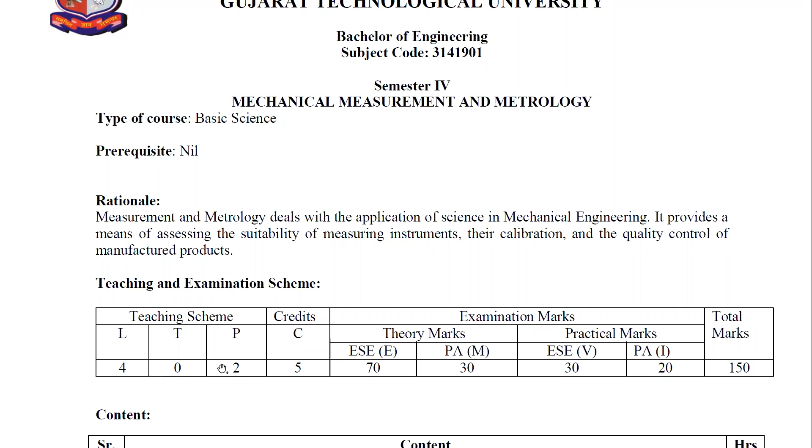Here, the total will be 4 lectures and 2 hours of practical per week, which means one lab and 4 lectures per week, and the total marks is the same as the others.

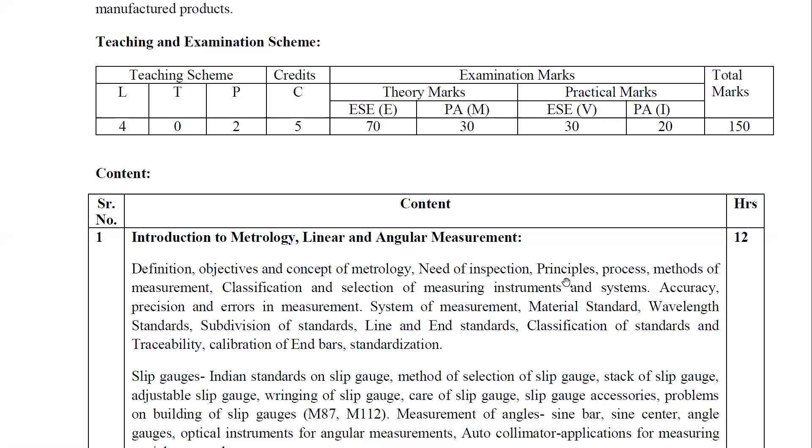The first chapter is the introduction to metrology, linear and angular measurement. Metrology is a science which involves all kinds of measurement. So that is the basic about metrology, and then starts the important part, that is the linear or angular measurement. As an engineer, you are supposed to make linear measurements as well as angular measurements.

In the metrology section, we will be studying the definition, objective, and concept of metrology. What is the need of inspection? What are the principles, process, and methods of measurement? What are the various methods for measurement? Then there is the classification and selection of measuring instruments and systems, what is the difference between accuracy and precision, error in measurement, and system of measurement.

Then there are various standards: material standard, wavelength standard, subdivisions of standard, line and end standards, classification of standard, traceability, calibration of end bar and standardization. So this section involves basically the first portion up to metrology, and then the measurement classification.

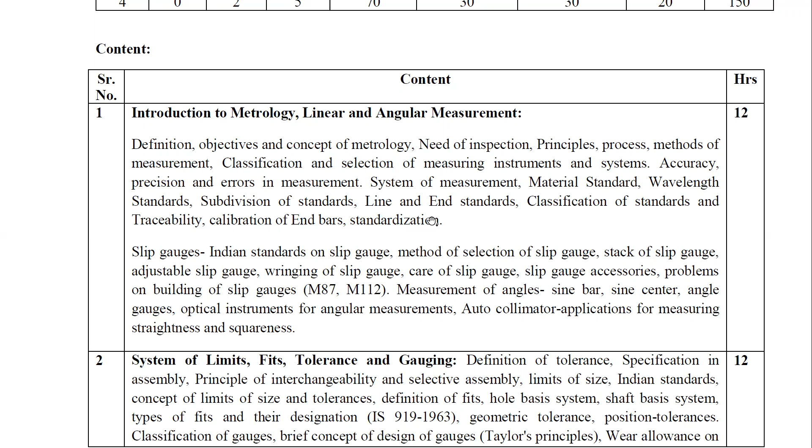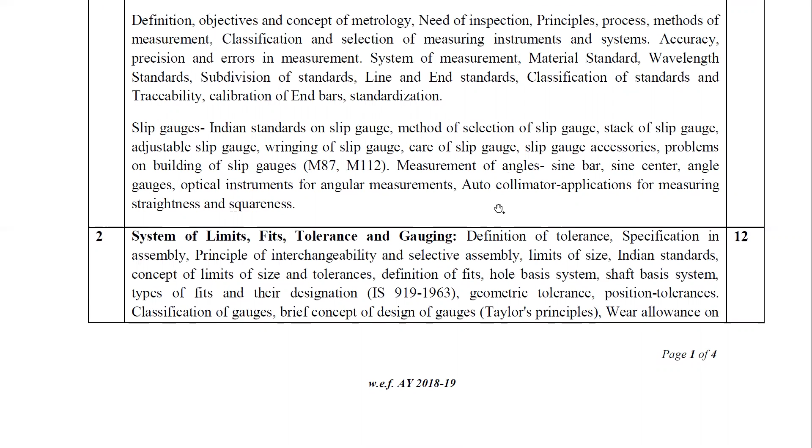The second part is about gauges, slip gauges, you might have seen or not. I will show you the slip gauges and what are the various standards on slip gauges, the method of selection of slip gauges, and the stack of slip gauges adjustment. You will also learn about measurement of angles, how to use a sine bar, sine center, angular measurement, autocollimator. These are the measurements of angles, such as straightness measurement and squareness measurement.

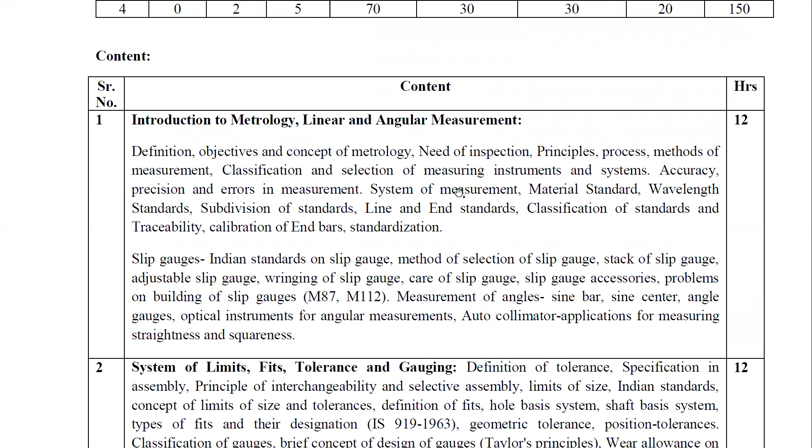So this is about the first chapter. These are the topics involved in it, and I will be discussing them one by one. Then in the second chapter, you are supposed to learn about the system of limits, fits and tolerances, and gauging.

Now, limits, fits, and tolerances, why are they necessary? As there will be parts which you will manufacture in any industry, the parts are manufactured with some amount of tolerance in them, which means they are not specific in size. Every time you manufacture, there is a difference, a certain amount of variation in the size of that part.

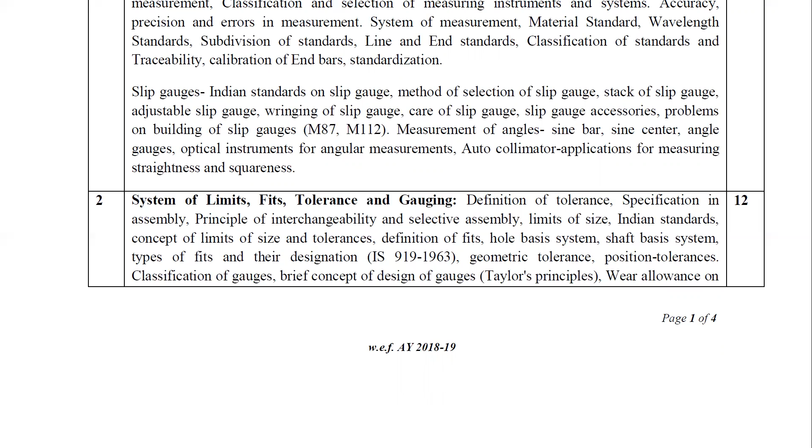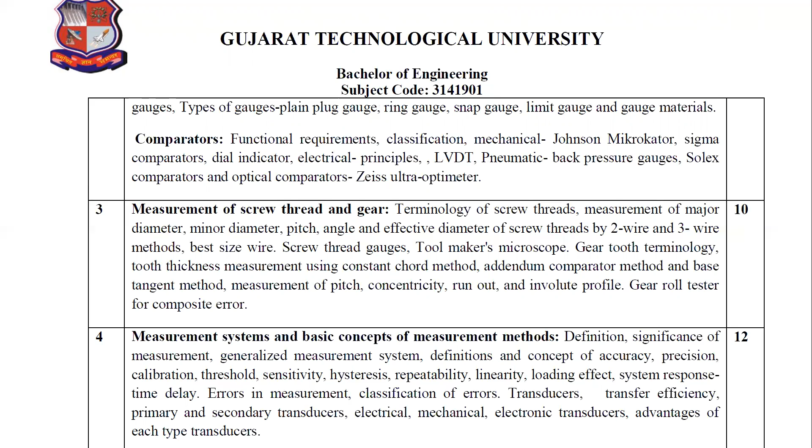The second portion involves the comparators, which are used to compare one dimension with another. Suppose we have a particular height or size of an object, and we manufactured it as a standard part. That standard height is to be compared with another object, or we want to calibrate some other part to check whether our gauge is working or if there is any error. So in the second chapter you will learn about comparators, system of limits, fits and tolerances, and also the types of gauges.

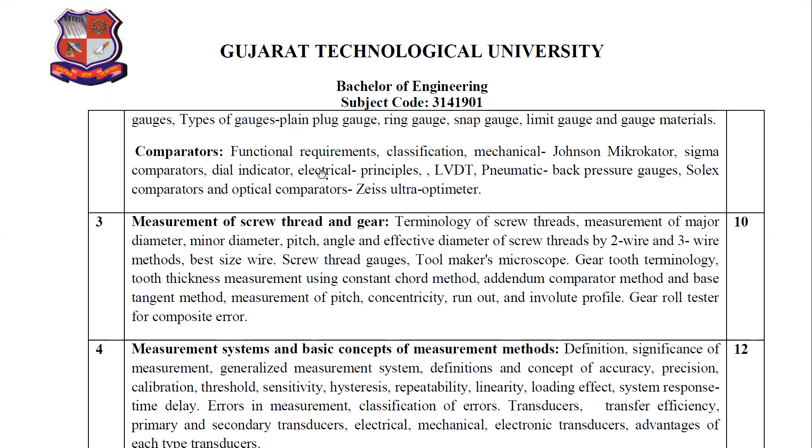The third chapter involves the measurement of screw, thread, and gear. Why is measurement required? Obviously, if the part is not measured, it will not fulfill its objective to fit. The metal parts are very important to be measured so that they can fit perfectly.

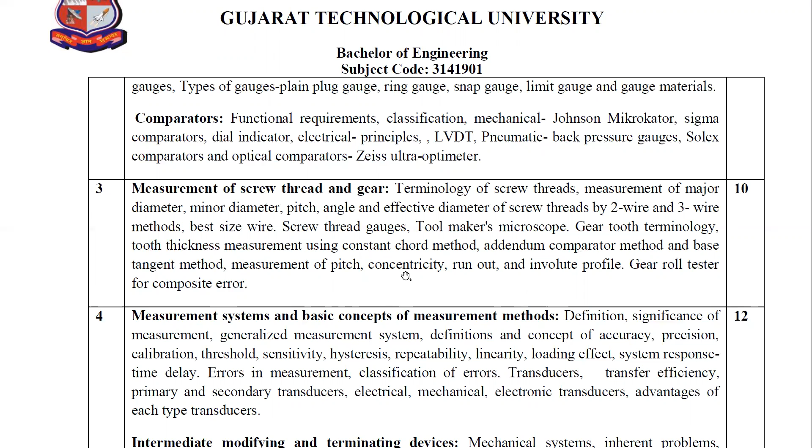How to measure the screw thread is also very crucial, and how to measure the gears too. So in this third chapter you will study the two wire method, three wire method for measurement, the tool maker's microscope, gear tooth terminology, and how to use various tools for measuring gear terminology.

The next chapter is the measurement system, basic concept of measurement methods. This chapter covers the definition and significance of measurement, generalized measurement system, and definitions of accuracy, precision, calibration. There are certain definitions related to instruments: what is the accuracy, precision, calibration, threshold, sensitivity, hysteresis, repeatability, linearity, and loading effect. These are crucial parameters checked for every instrument before conducting any measurement.

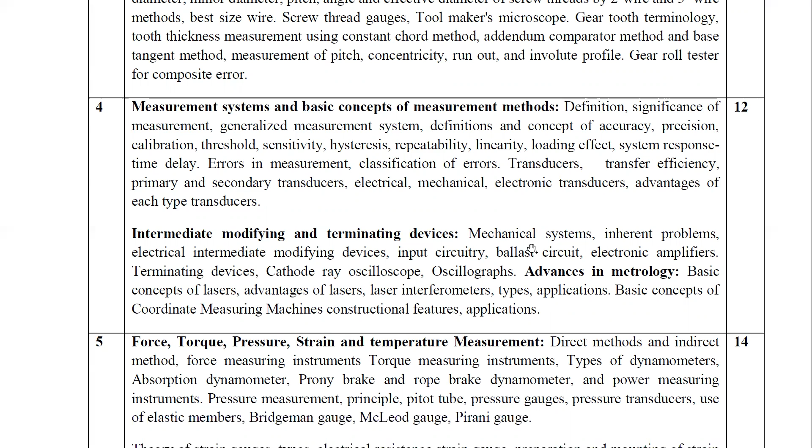After that, we check what is the error in measurement, how to remove that error, and what is the classification of errors. Then there are transducers, various types of transducers - primary, secondary, electrical, mechanical, electronic. Also new this year is the portion on intermediate modifying and terminating devices, which includes mechanical system inherent problems, electrical intermediate modifying devices, input circuitry, ballast circuit, electronic amplifier, and terminating devices like cathode ray oscilloscope and oscillograph.

Then there is advances in metrology. This is very important because it involves advanced topics seen in industry where high precision work is done, such as the concept of laser interferometer, its types and applications. Then there's basic coordinate measuring machines - coordinates are to be measured in every aspect.

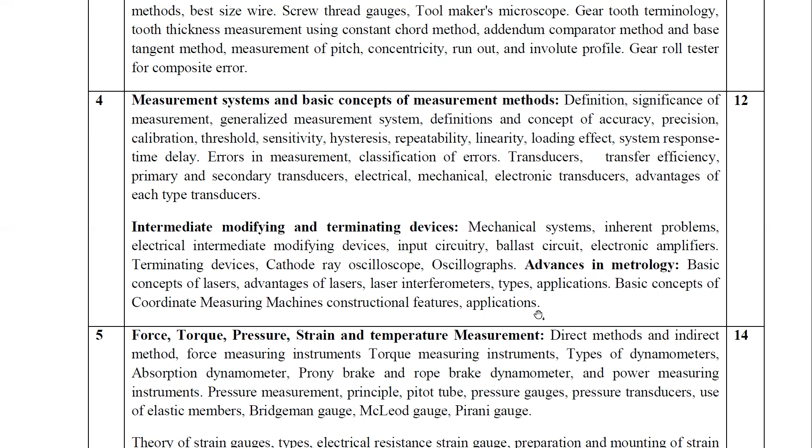I will show you one website of Mitutoyo, a Japanese company that manufactures all kinds of measurement instruments. It is in fact the top company in the measurement industry, in this field of metrology.

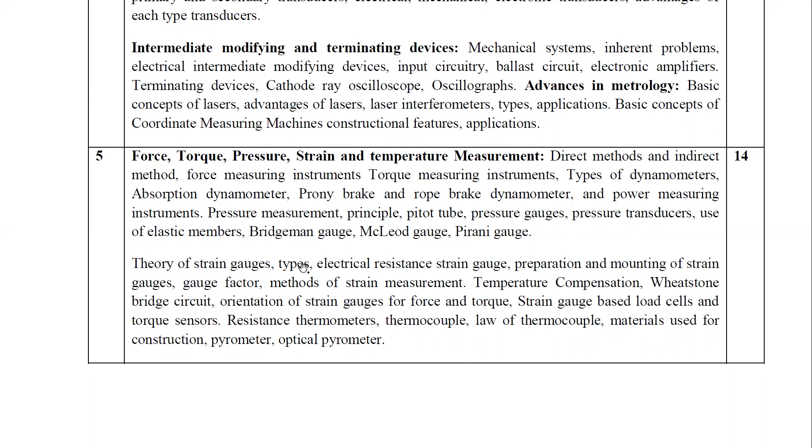And the final chapter, fifth chapter, is force, torque, pressure, strain, and temperature measurement. You will learn how to measure force, torque, pressure, strain, and temperature in this chapter. So these are the five chapters involved in this subject in the syllabus.

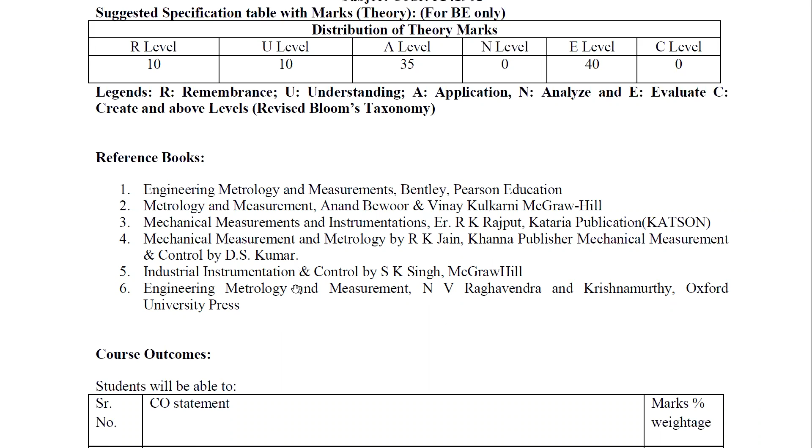Some reference books you can refer to: Pearson publication, McGraw Hill publication, R.K. Rajput, and Oxford University Press - this book is also good, as is D.S. Kumar. Any of these books you can refer to, whichever suits you.

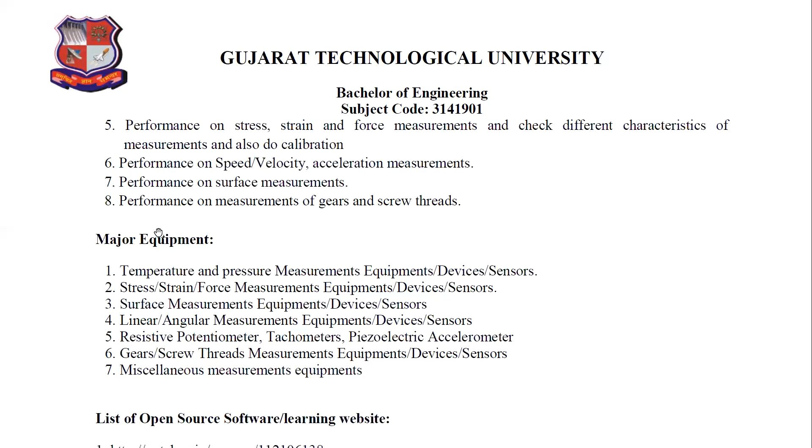And there are various experiments, total 8 experiments, and the equipment related to them, and one website for an NPTEL course. So this is all about the syllabus.

Now let us start with our subject, and chapter number 1 is Introduction to Metrology, Linear and Angular Measurement. First, what is metrology? Basically, metrology is the science of measurement, and it may be divided depending upon the quantity under consideration into metrology of length, metrology of time, depending upon the field of application. It is divided into industrial metrology, medical metrology, etc. So metrology is not only related to mechanical engineering, don't get confused with that.

Metrology is a generalized science of measurement that involves all kinds of measurement, such as industry measurement and medical measurement. So metrology is divided depending upon the quantity under consideration - for length, it's metrology of length; for time, it's metrology of time. Now, can you guess what is the diameter of our hair? How would you measure it? Have you ever thought about that?

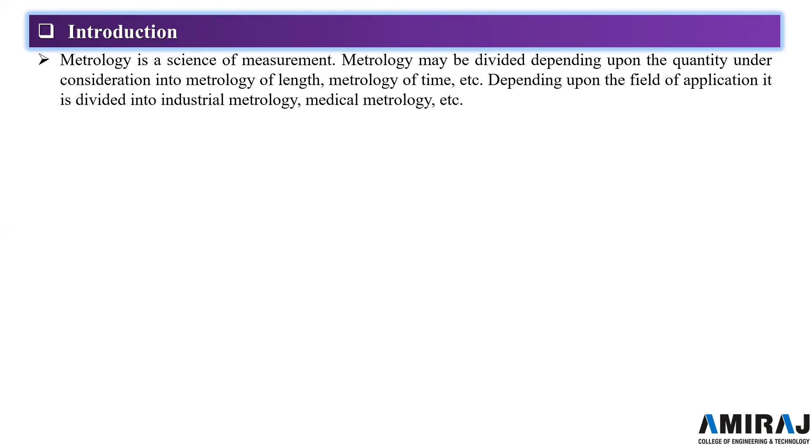As we move further, there is industrial metrology or medical metrology, and engineering metrology, which is strictly restricted to the measurement of length, angle, and quantities expressed in linear or angular terms. All kinds of measurement can be done with length or angle measurement and other related quantities. So in engineering, you are supposed to measure only linear or angular quantities most of the time, but the precision required is very high.

For every kind of quantity measured, there must be a unit to measure it, and this will enable the quantity to be expressed as a number of that unit. Further, this unit must be followed by all, there must be a universal standard, and the various units for various parameters of importance must be standardized.

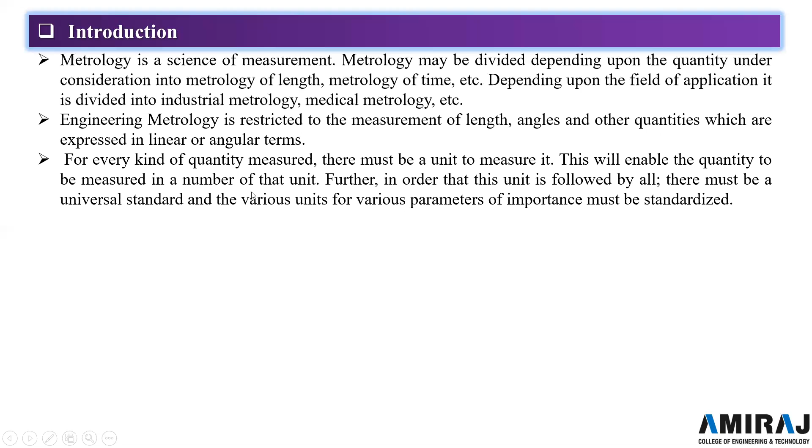So to assure quality, measurement is required, and it is also necessary to see whether the result is given with sufficient correctness and accuracy for particular need or not. This will depend on the method of measurement and the measuring devices used.

Thus, in a broader sense, metrology is not limited to length and angle measurement, but it is also concerned with numerous problems, theoretical as well as practical, related to measurement.

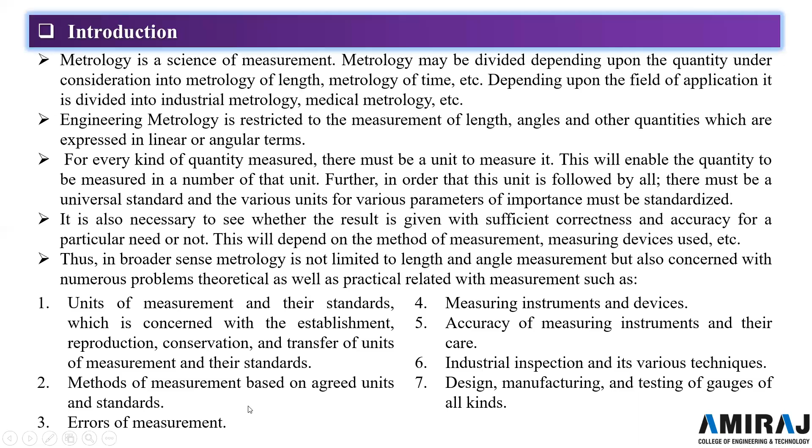Now, what is the need for inspection, and why is inspection needed? As we know, first, what is inspection? Inspection is checking all materials produced or components and parts at various stages during manufacturing, and it is the act of comparing material, product, or component with some established standards.

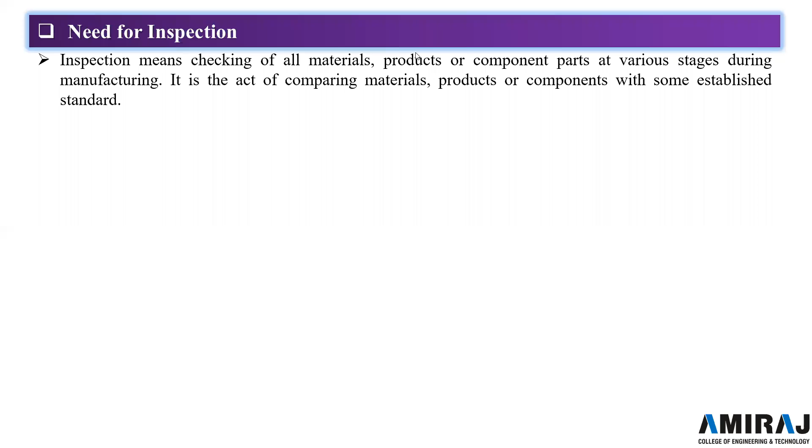In old days, production was on a small scale, so different component parts were made and assembled by the same craftsman, and if the part did not fit properly at the time of assembly, he used to make necessary adjustments in either mating part so that each assembly functions properly. Therefore, it was not necessary to make similar parts exactly alike or with the same accuracy, as there was no need for inspection.

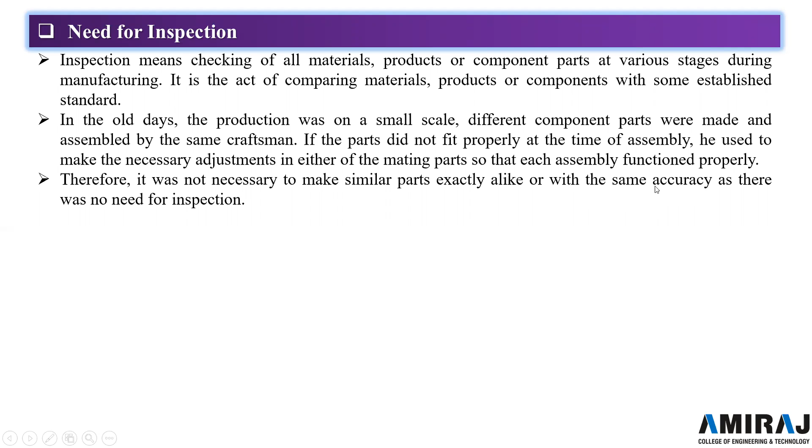Nowadays it is very much required to attain the same accuracy. Here I am repeatedly using the terms accuracy and precision - later on I will explain these terms in detail.

Now, due to technological development, new production techniques have been developed.

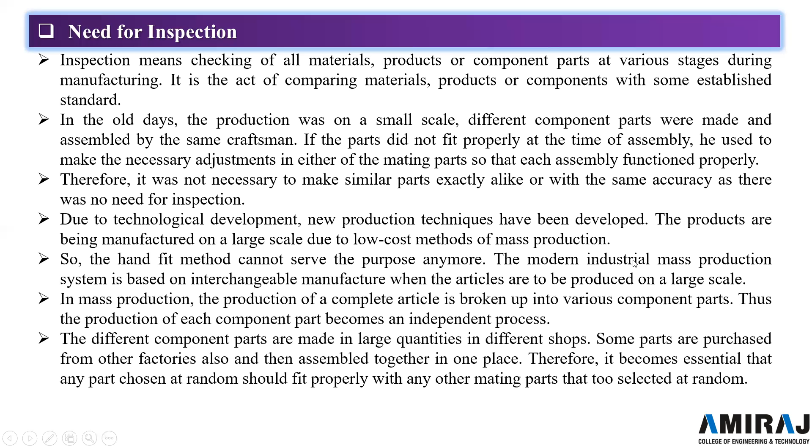So here the metrology plays a very important role, and we will see how it is done.

Further, this is possible only when the dimensions of the component parts are made with close dimensional tolerances, and this is only possible when the parts are inspected at various stages during manufacturing. So the at various stages inspection becomes very crucial.

When a large number of identical parts are manufactured on the basis of interchangeability, if their dimensions are actually measured every time, a lot of time will be required.

Hence, to save the time, gauges are used, which can tell whether the part manufactured is within the precise prescribed limit or not.

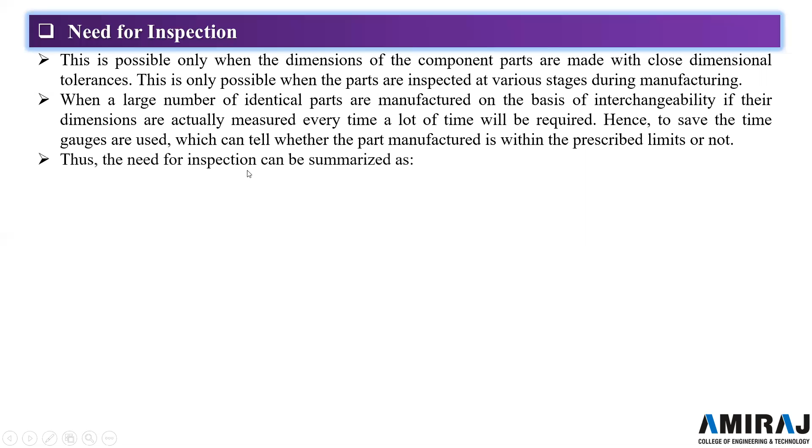Thus, the need for inspection can be summarized as to ensure the part, material, or component conforms to the established standards.

Secondly, to meet the interchangeability, which means the changing of a part or component from one to another.

To maintain customer relationship by ensuring no fault product, which means there is no fault in it.

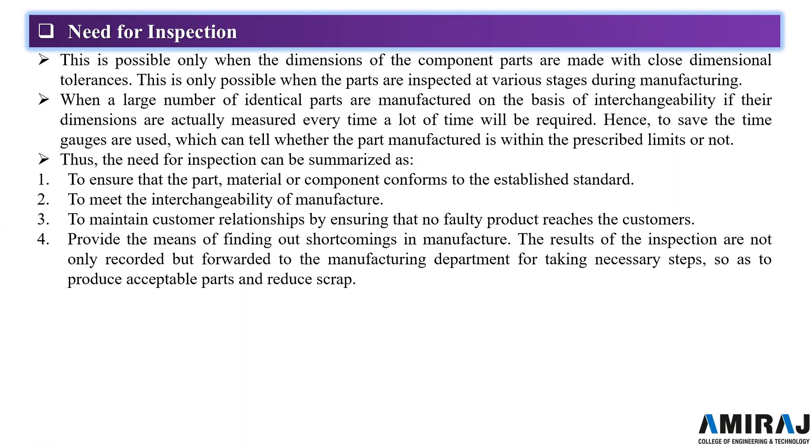Then another need is to provide a means of finding out the shortcomings in manufacturing. The results of inspection are not only recorded but forwarded to the manufacturing department for taking necessary steps so as to produce acceptable parts and reduce scrap.

So it helps to purchase good quality raw material, tools, and equipment, which governs the quality of the finished products. It also helps to coordinate the functions of quality control, production, purchasing, and other departments of the organization.

So these are the various needs of inspection, and the main one is to make the product compatible so that there is minimum loss, as the parts if produced with precise accuracy, there will be less chance of error, less scrap, and the product will be more acceptable.

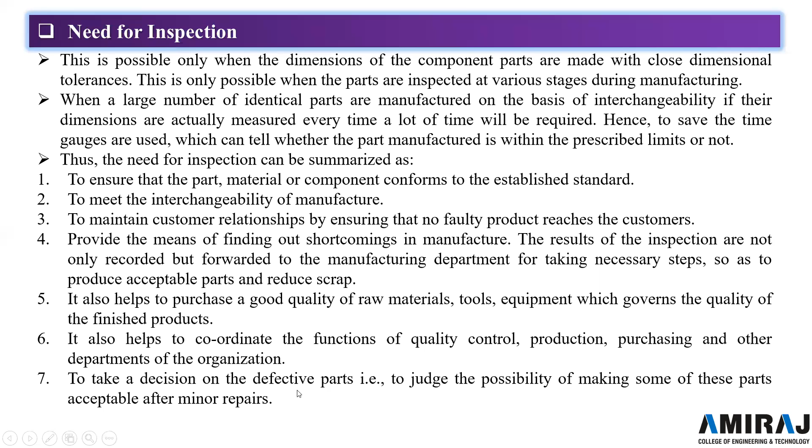So the basic requirements here are that customer relationships are ensured and the shortcomings in manufacturing can be overcome. Then good quality of raw materials, and quality in every aspect. So this is about the need for inspection to take care of the defective part.

So before ending today's lecture, let me show you one website of Metrology.